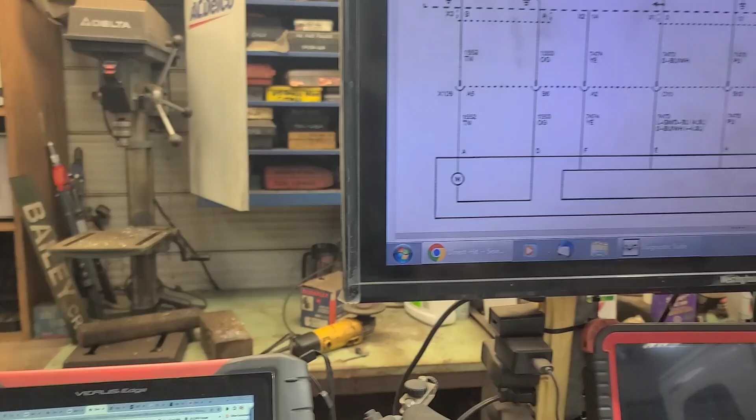Well, good morning, viewers. Today we're working on a 2009 Silverado Hybrid. That's the early EV offering that GM had in a pickup truck. And we've got a problem with the transfer case, the service transfer case message on the dash.

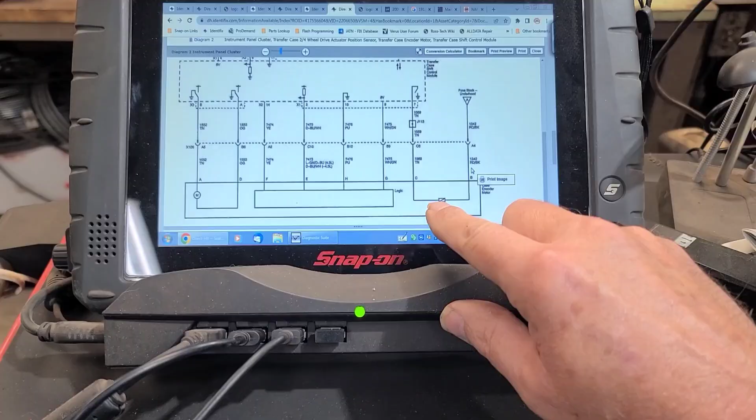We've got a code C0321-04 for the lock solenoid, which is this part right in here, being an open circuit or high resistance. I put an ohmmeter across pins B and C of the encoder motor, and it's 15 ohms, so it's not open.

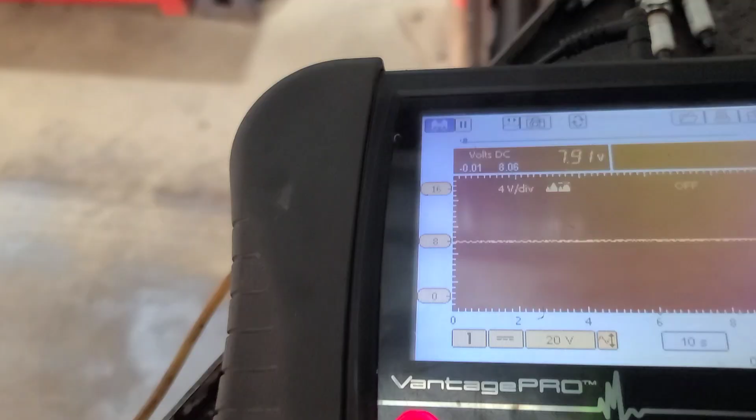But pin B is ignition power, battery power, and as you can see, I've only got 7.9 volts on the red wire. Let's make sure I got a good ground here. And of course, if I put a test light in there, it doesn't light a test light at all. So let's look at the electrical circuit again.

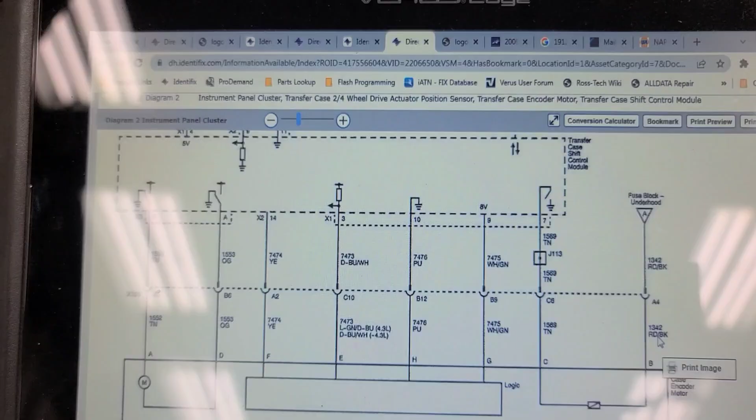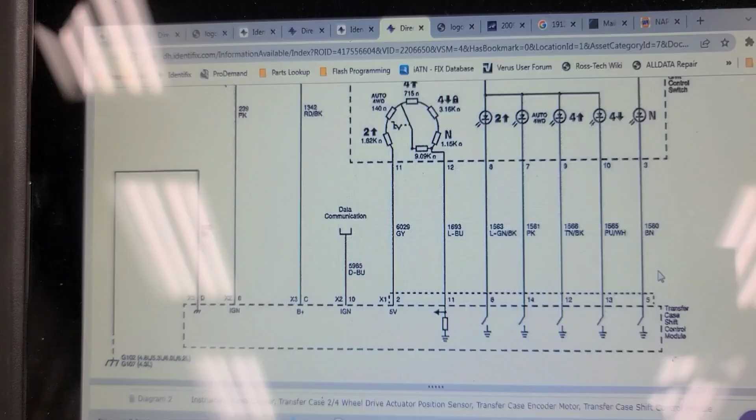So according to this, it comes from A on the previous diagram. And A on the previous diagram comes from the TREC fuse. Fuse number 67, it looks, for gas. Now there is a connector in between, and that could be green. Connector 106, X106. So we're going to check that fuse first, make sure it's not corroded.

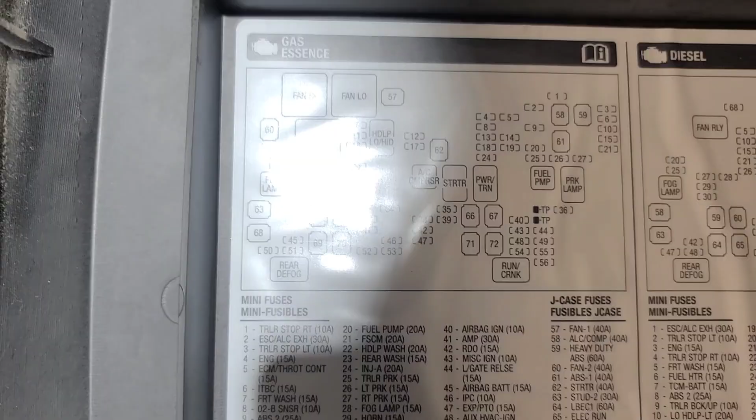So on the gas application, it's fuse 67, which is a J-case fuse. It's that one right there. And it has a little window over it, so we'll have to pop it out and have a look at it. It looks okay visually, but we're going to test it. So I popped the cap off the fuse and I tested for power with a test light on both sides of the fuse, and it lights.

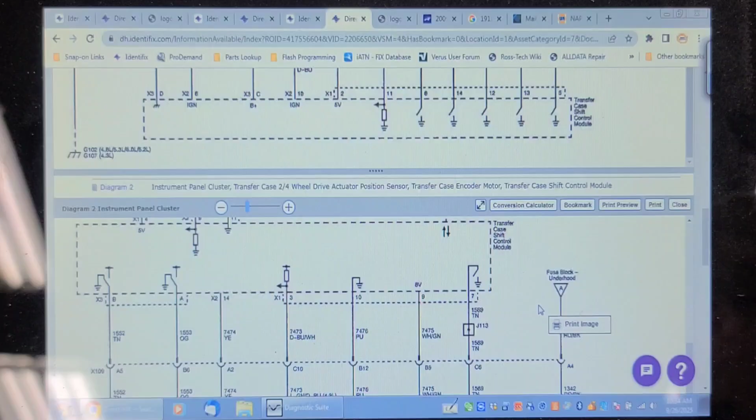So I think that connector down there is the X106. We're going to investigate that, but I'm going to double check the connector view. So it's actually X109, and it's pin A4, so it's a fairly big connector, and that's a red and black wire. I'm just writing this down. Let's go see if we can find out where X109 lives.

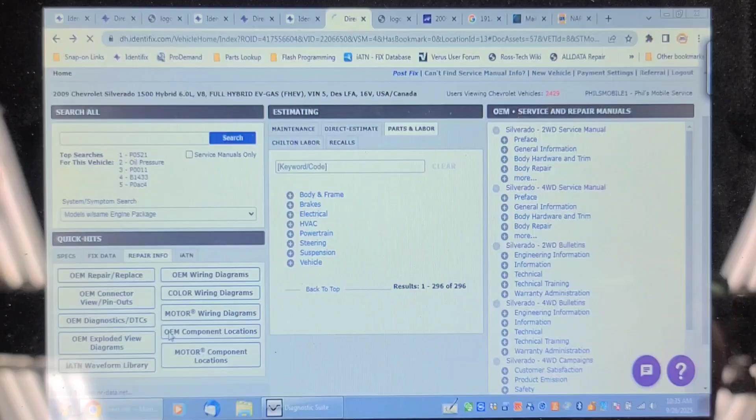Connector, component locations. X109. Diesel 6.2 4.8 engine harness. Let's go to the master electrical component location. I got to go all the way down to X.

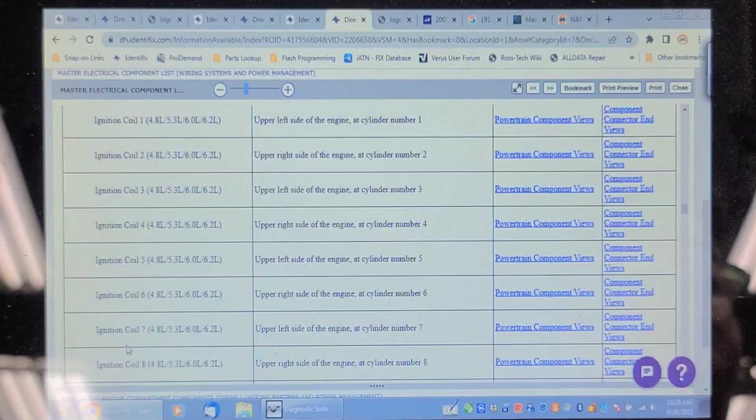Hyperlinks would be nice. I don't even think they have them on OE software. You know, Ford and Chrysler do, but maybe GM does too.

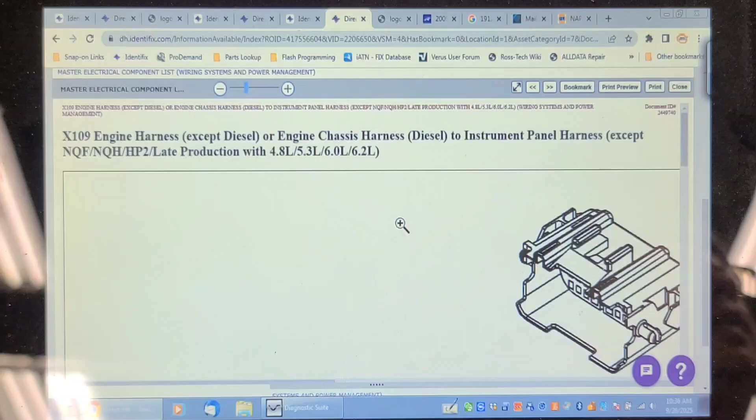X109. This has the NQH, 40 cavities, engine harness except diesel, on left side of engine below the fuse block. Connector views. Oh, brother. Except diesel. Let's try this one. So that's what it looks like. Now I'm going to have a look in the engine bay.

So that connector I looked at was except HP2, which is hybrid, and this one's hybrid. So I think it's except diesel with NQF, NQH, and HP2 except late production. I don't know how we know if it's got late production or not, but except late production with 4.8, 5.3. This has got the 6 liter. So let's see, it's black. It's a 40-pin latched connector. And I think I said it was an A4.

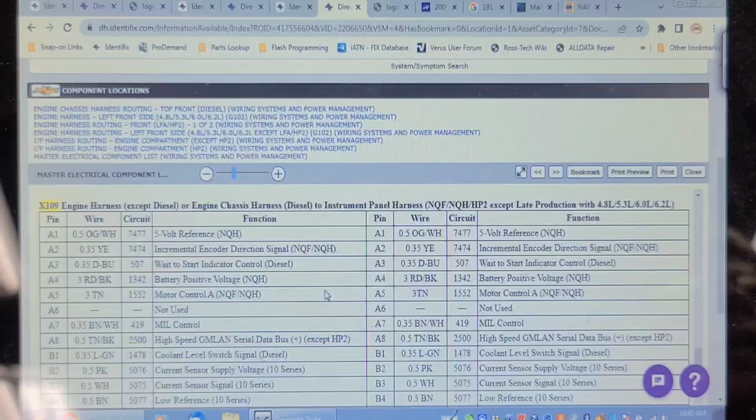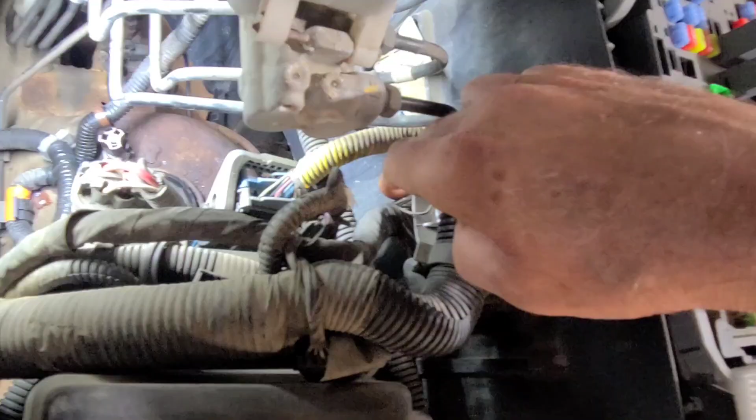Circuit 1342. Well, so that's 1342, battery positive voltage, NQH. Okay, so it's a black connector, 40 pins. Now I'm looking at the vehicle, and there are several connectors in that area. There's one here, but I don't think that's it. And there's one right underneath here. That could be it. Oh well, we'll see if we can get it out.

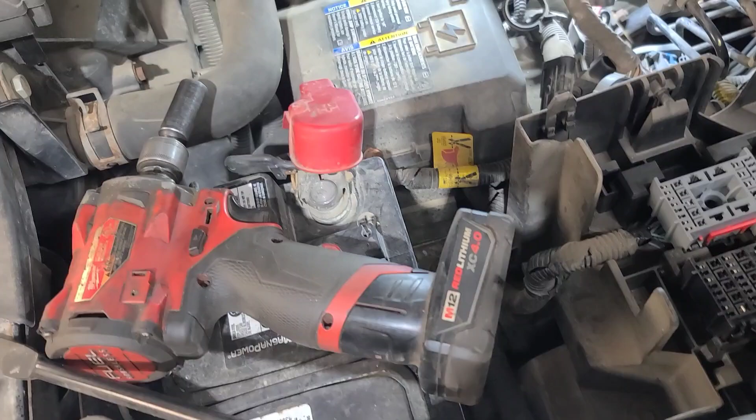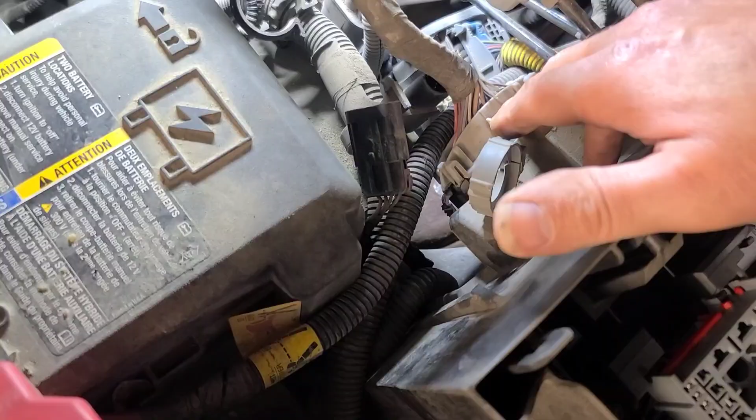Well, this is not pleasant. I think this might be the connector. I had to take the fuse panel out, which was a good idea anyways, because these fuse panels tend to corrode, but it looks pristine, this thing. I think this is the connector. I'm just printing off a connector view, trying to identify it.

But this module of some kind here is part of the brake system, it's different on this. So the brake master cylinder is bigger and it's in the way. I might have to take this cover off to get at this connector, but I'm going to see if this is the connector in question. It doesn't look corroded from the outside.

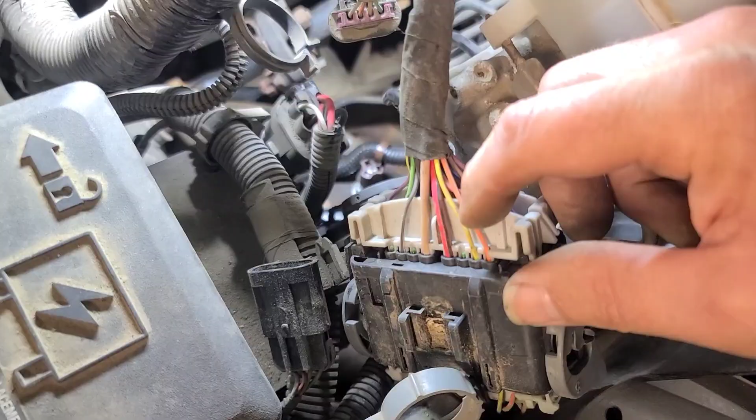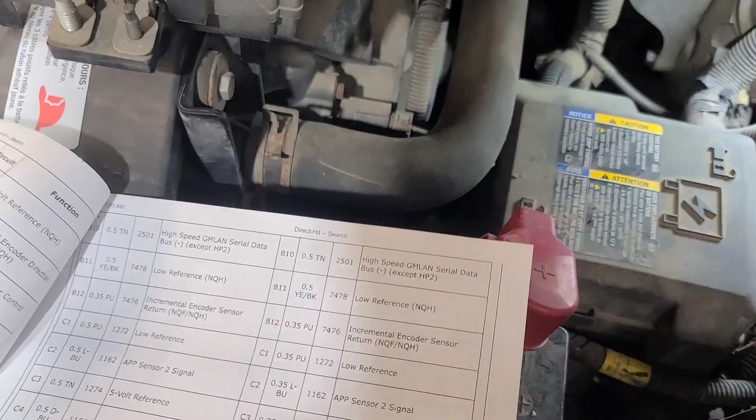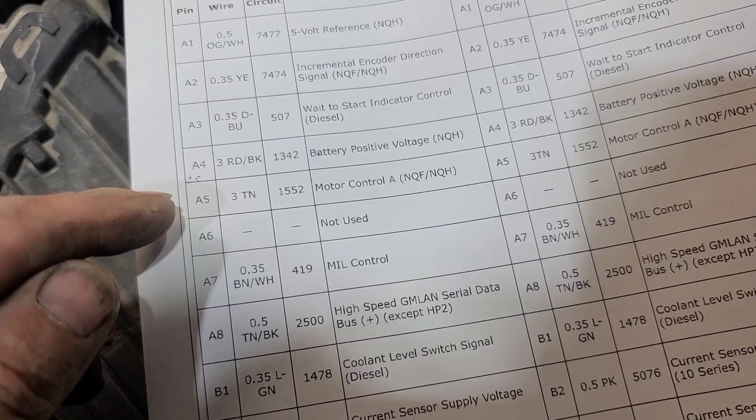So that is the connector. This is A1, 2, 3 is missing. 4 is the red black wire with the power to it, and that's one of the other transfer case circuits, that tan wire. I think that's the actual solenoid circuit. Let's see. A5 is the motor control. But one of these wires will be for the solenoid. But A4 is battery positive. Looks like it should be live all the time.

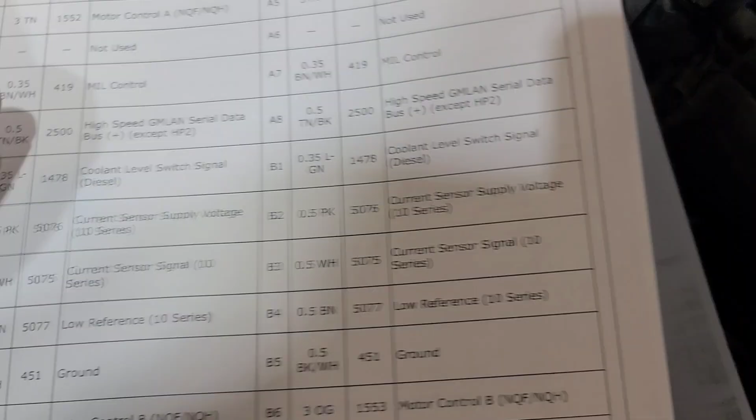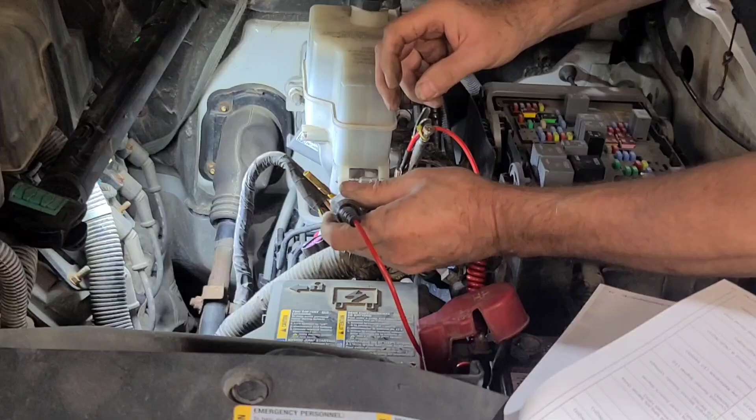I got to put the fuse panel back in and reconnect the battery. But I'm going to take this connector apart and look at the inside of it. So with the fuse panel reinstalled, make sure I got power. Back pinning that wire coming out of there, and then you can see we have power there. And I'm sure that's from that fuse. I'm going to pull that fuse just to make 100% certain we're on the right circuit.

We have no power there. That is definitely the right circuit. So somewhere between here and the transfer case the wire is compromised. It looks like it runs into this harness here and up over the top of the engine. Maybe we should pull that cover off and see if there's any rodent activity or something.

Where'd that little cap go? Oh, there it is. Okay. Let's pull that cover off. Maybe we'll get lucky.

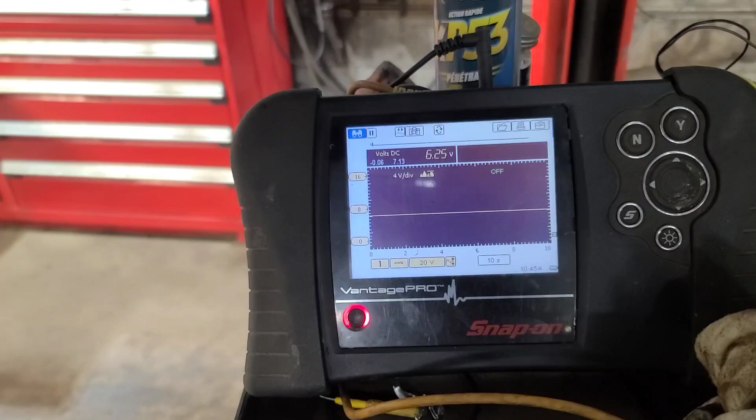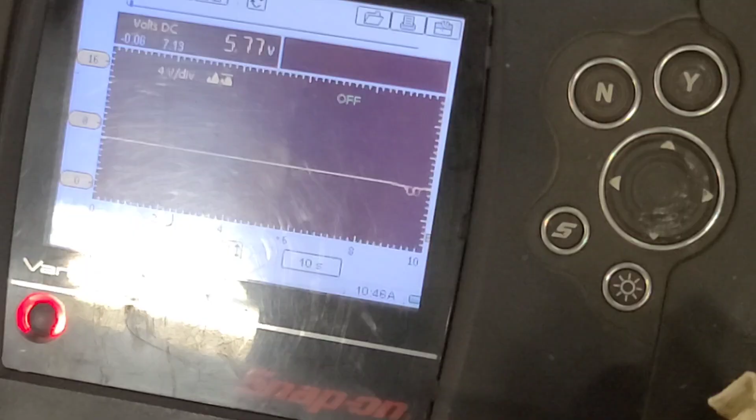Well, we don't need the key on to test that because it's live all the time. So I got the voltmeter connected to pin A4, which is the red-black wire, and the transfer case ground. And I'm graphing 6.25 volts. Now I'm going to set up this camera so it's stationary. So I'm going to manipulate the harness just in front of the transfer case. I'm flexing the harness. So the wires are compromised just in front of the transfer case.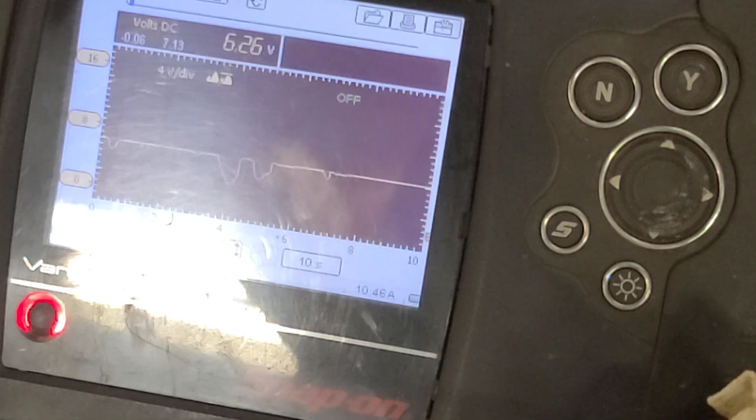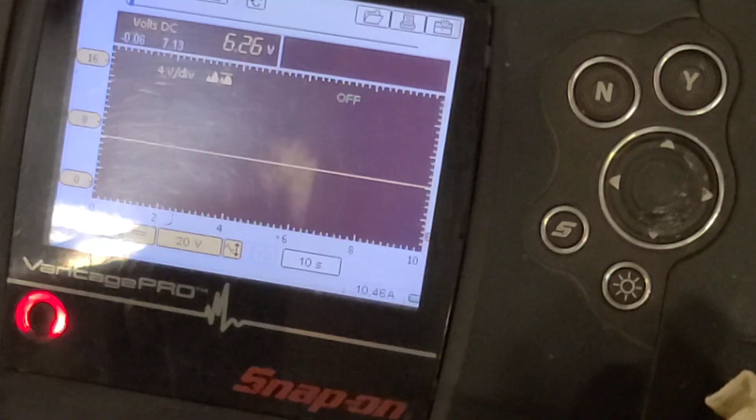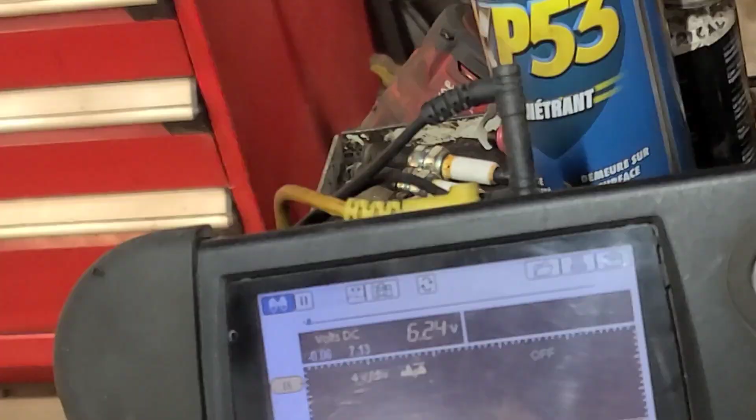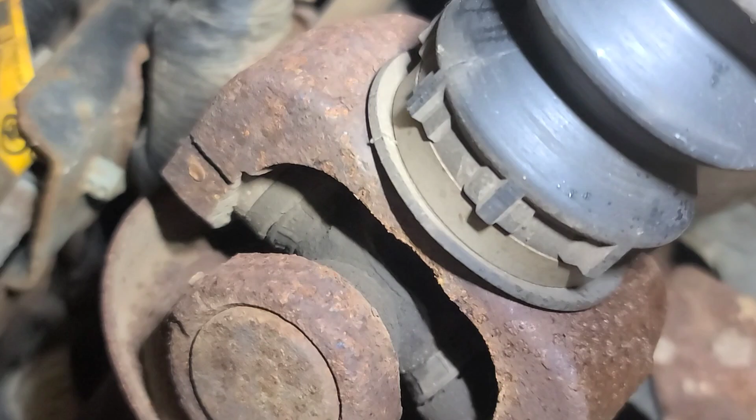Why would they be compromised? Oh, there's a metal bracket right there. I'll have to pull this harness down and see if we can... I'll show you what I'm looking at here. That metal bracket right there. You can see the gray push pin beside it. That's the harness I was moving. So I'm going to see if I can pull that harness down inside under the vehicle here. As I said, this is live all the time, so we don't need to have the key on.

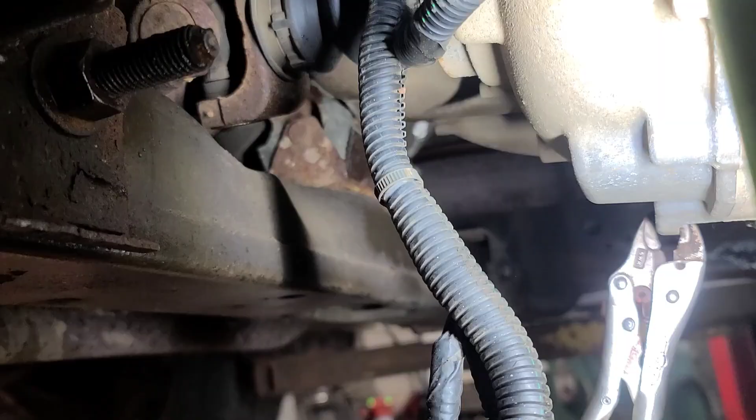So some of you will remember the Friendly Giant. Look up. Way up. There's Rusty.

So that harness was rubbing on the transmission shift cable. So maybe I can fix it. So there's with the tape pulled off of it, you can see the red wire compromised, but that beige wire right next to it is also compromised. So there's the problem with running an overlay wire. You'd run a new red wire and then that beige wire would fail several months later because it's still corroded or it's compromised. So let's splice these wires back together.

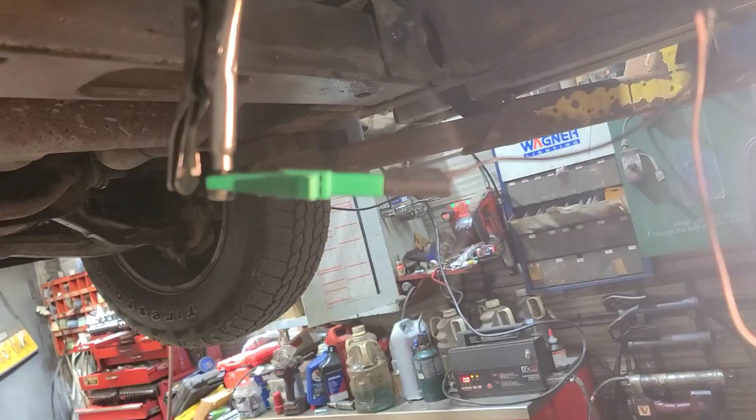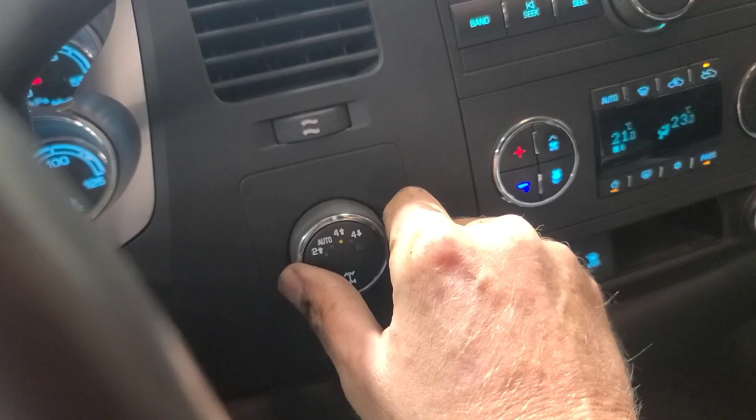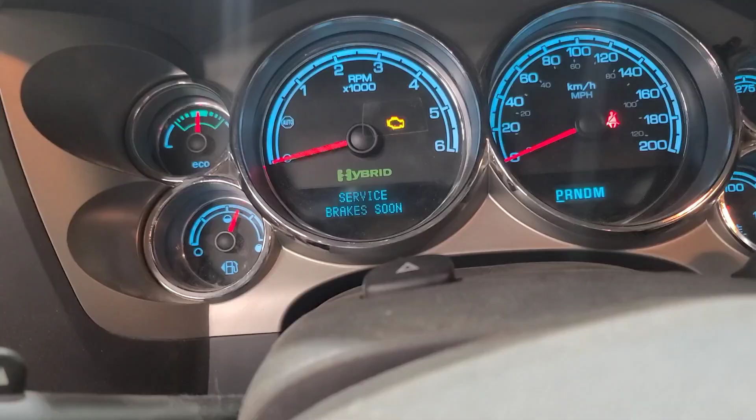So I got the wires spliced, soldered and sealed with heat shrink. You can see it lights a 2057 or 3057 bulb now. So we're going to put it back together, put some dielectric grease on the connector seals, and wish I'd manipulated that harness before I went to all the trouble looking under that fuse panel. So let's see if it works. Seems to. We still got a service brake message. I'm not sure if that's related to the stored codes or there was a pressure code of some kind in there. So we're going to have a look at that now.

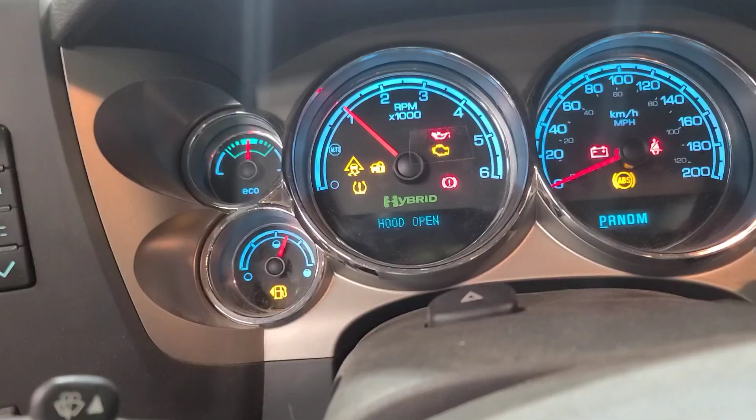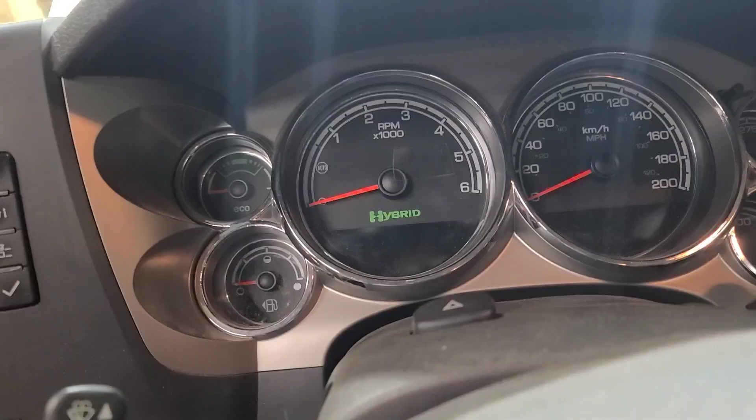The check engine light is on because of an evap vent solenoid. The vent solenoid is open. I've already diagnosed that. But the four-wheel drive works. I'm going to put a battery charger on this. So we're going to go into the ABS and see what codes are in there. Let's see if there's any current codes. Regenerative axle pressure sensor short to battery, current DTC, C012C. It's had that code before. But the other code's related to the ABS. I'm going to do a network code clear.

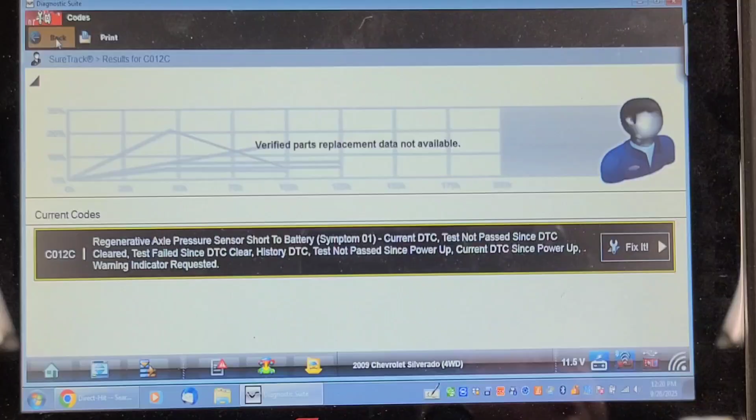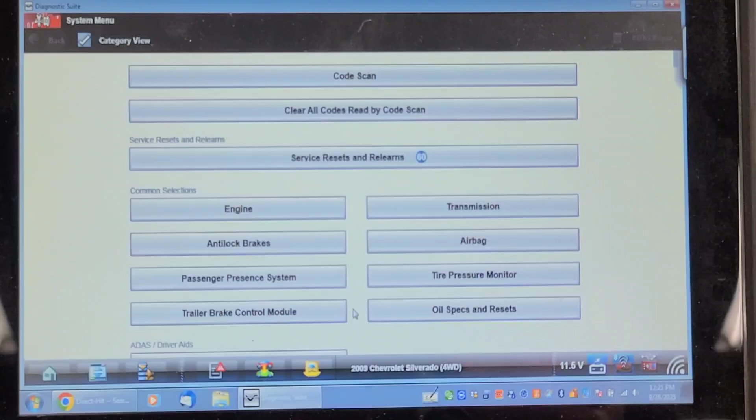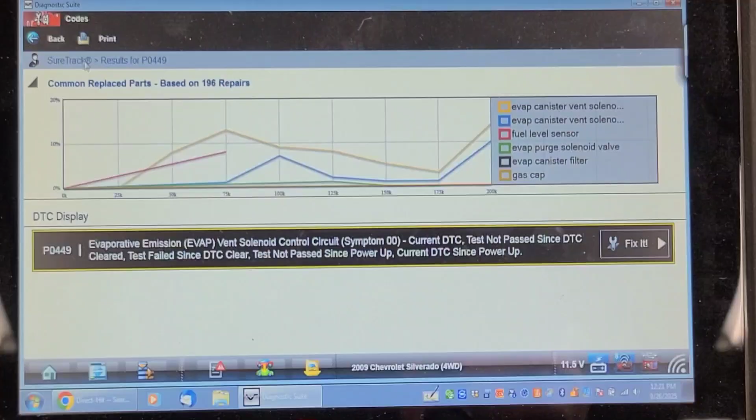Oh, my battery charger is not working. We'll pick up when we get to the end of this network code clear. Oh, that was fast. Well, I know the engine code will be back for the open vent solenoid, because I've already diagnosed that. P0449, it needs a vent solenoid. Let's go back into the ABS and see if that code is present still. I wonder if that turns on any warning messages. It says warning indicator requested.

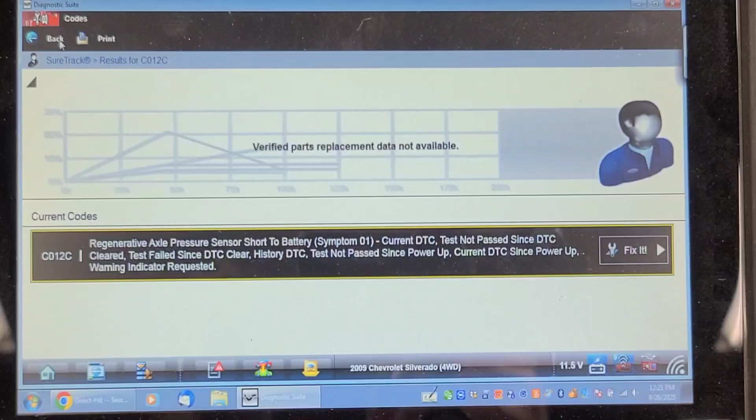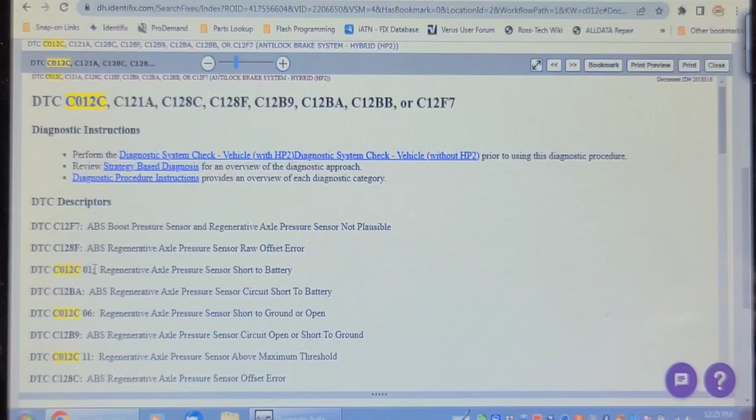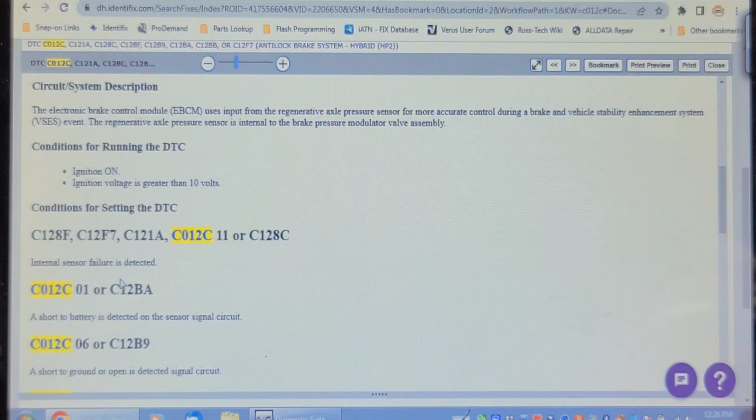So here's the diagnostic trouble code C012C, and it is a failure mode 01. Regenerative axle pressure sensor short to battery. So it says the electronic brake control module uses inputs from the regenerative axle pressure sensor for more accurate control during a brake and vehicle stability enhancement system event. The regenerative axle pressure sensor is internal to the brake pressure modulator valve assembly. Well, I'm not liking that. Conditions for setting is C012C. Internal sensor failure is detected. Well, I bet you it's one of those. Clear the codes. If it comes back, replace the module.

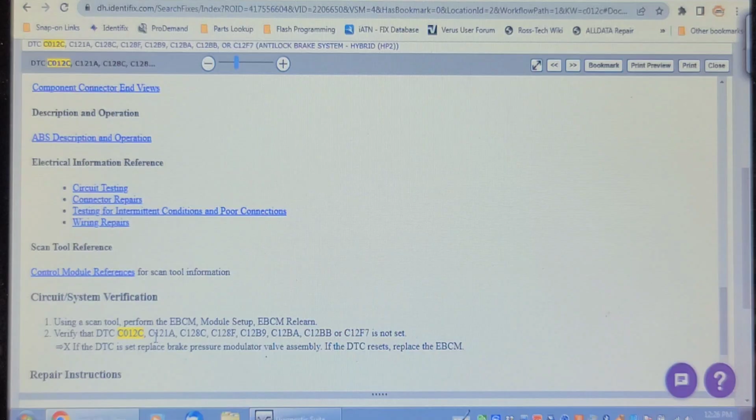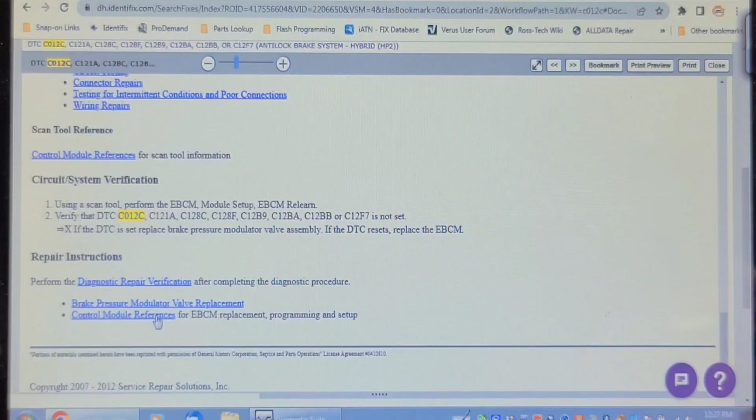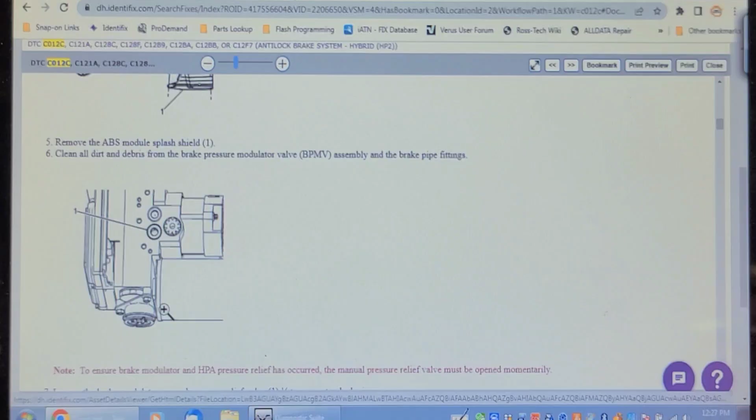Let's see what it says. Using a scan tool, perform a relearn. If set, replace the brake pressure modulator valve assembly. I like that. If it's set, replace the brake pressure modulator valve assembly. If the DTC resets, replace the EBCM. So they're not even sure. The manufacturer is firing the parts. So they change the hydraulic unit first, which is a major pain in the ass because you got to undo all of the brake lines. And this is going to be unique because it's a hybrid. Wow. It's a much bigger assembly.

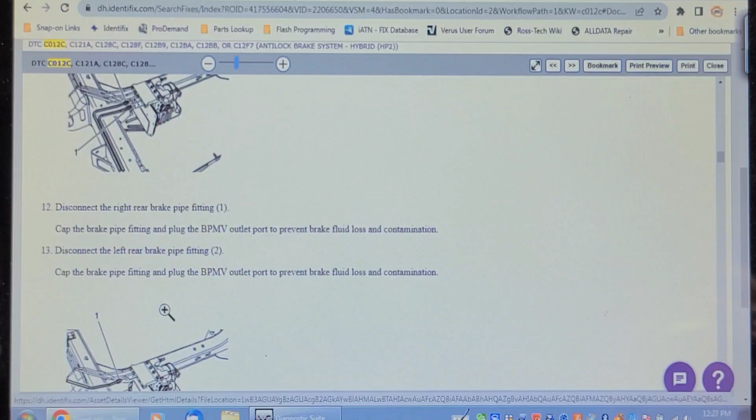Well, I don't think he's going to fix that. He was worried about the four-wheel drive, and that's working. He did ask me to check the AC, but I'm going to call him and see if he wants me to change that vent solenoid.